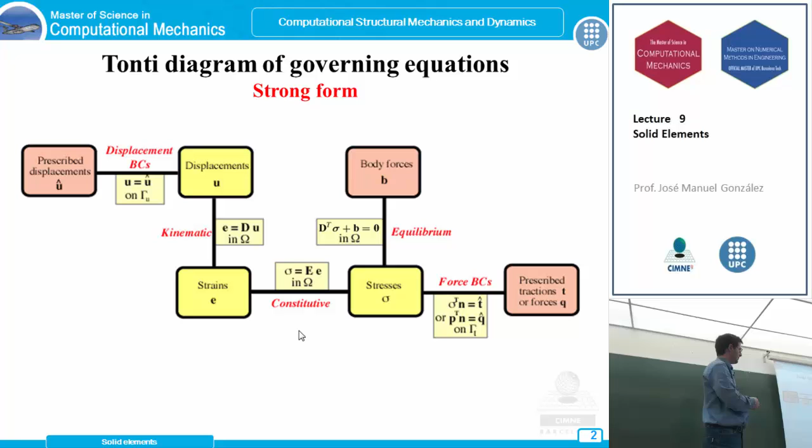So we involve the displacements as our primary variable, the strains, which are the first derivative of these displacements, the stresses, which are related with the strains using a constitutive law. So in fact, these stresses involve a first derivative of the displacements as well, and they are constrained by these prescribed displacements, which involve this primary variable, the body forces and the prescribed tractions, which involve this stress domain. So these are our unknowns, and this is our data. The yellow squares are the unknowns, and the red ones are the problem data. So this is the problem we are trying to solve, the same scheme we've been following until this class. This is the weak form.

Remember that our strong form is transformed using this total potential energy principle. So we are solving a minimization problem for the equilibrium equations and the prescribed boundary conditions in forces. So our problem is a weak form using this integral of the energy. So this is what we call the weak form of the problem, and this is something important we're going to talk about a bit later when we talk about convergence.

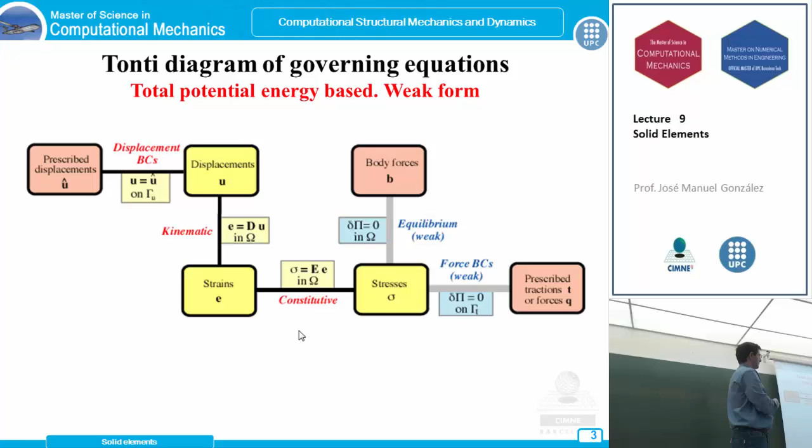So in the case of solid elements modeling, there are some important things to say, because really the world is a three-dimensional problem. So usually we have to solve a three-dimensional problem, and we want to model all the details in our structure. So these solid elements allow us to make a much more realistic simulation. The boundary conditions are applied in a realistic way. The loads are applied in a realistic way. The geometry is able to take into account all the details. So in fact, we are trying to model three-dimensional problems.

This is our objective. The point is that this three-dimensional simulation has got quite an expensive price to pay, because usually our meshing work is much more difficult. The computational cost is quite higher if you want to solve a three-dimensional problem. Even the post-processing phase could be much more complex, because the results we are going to obtain are much more difficult to interpret. So a three-dimensional problem is not always the best thing to solve, depending on the complexity of the geometry in our problem.

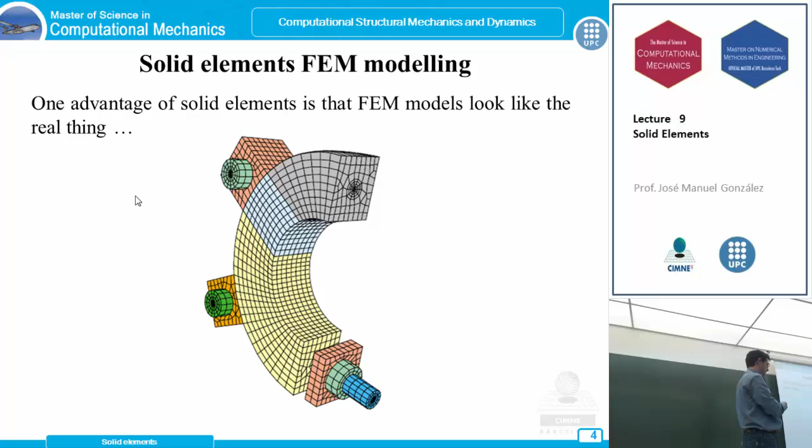Okay. If we talk about solid elements, we have three standard solid elements as a reference, usually employed in this simulation. Same way that we have triangles and quadrilaterals in the plane stress or in the plane problem. In three-dimensional, we have tetrahedron and hexahedron, usually the most useful solid elements. I like hexahedron. I prefer hexahedron for three-dimensional simulation.

Tetrahedron has got the same capabilities and the same problems as triangle. It's very easy to get a mesh with tetrahedron, but for structural analysis, the results are not very good. So we use tetrahedron above all to teach the finite element formulation. Although if you want to get a good result with a tetrahedron mesh, you must use a lot of tetrahedron elements to get a good accuracy in the simulation. So I usually prefer for a three-dimensional simulation the hexahedron, we call it brick, this hexahedral element.

We have this pentahedron element, which is with a triangular base. It's not very common, but sometimes it's useful for very special cases. For example, imagine that you want to make a structured mesh. This is a typical example. This is a dam, and you want to make a structured mesh of your domain, and sooner or later you will find these kind of elements here, these triangular based solid elements. So to adapt a structured mesh to a non-rectangular, non-square domain, we use these sort of Toblerone elements, called pentahedron elements, wedges.

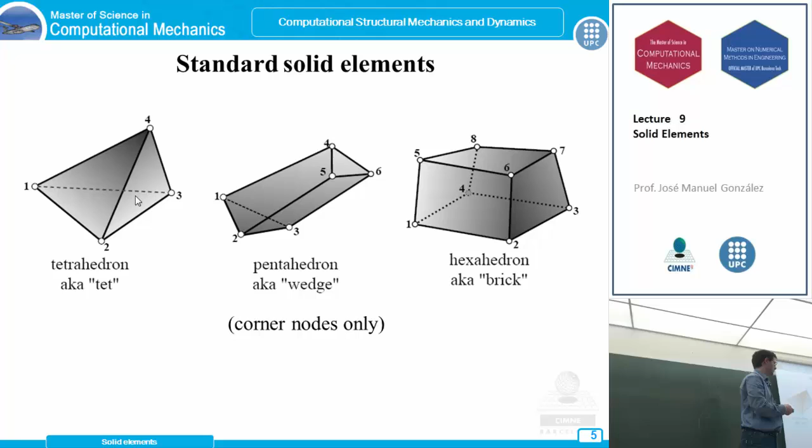These are the three reference solid elements, and they are represented here with the nodes in the corners. So we have 4 nodes, 6 nodes, and 8 nodes for these 3 reference solid elements. They are not only formulated with the nodes in the corners, so we can create solid elements with the nodes in the midpoints of the edges. So here in the upper part, you have the representation of a quadratic tetrahedron, hexahedron, and a quadratic pentahedron, and we have 2 non-standard solid elements, these 2 elements here in the lower part.

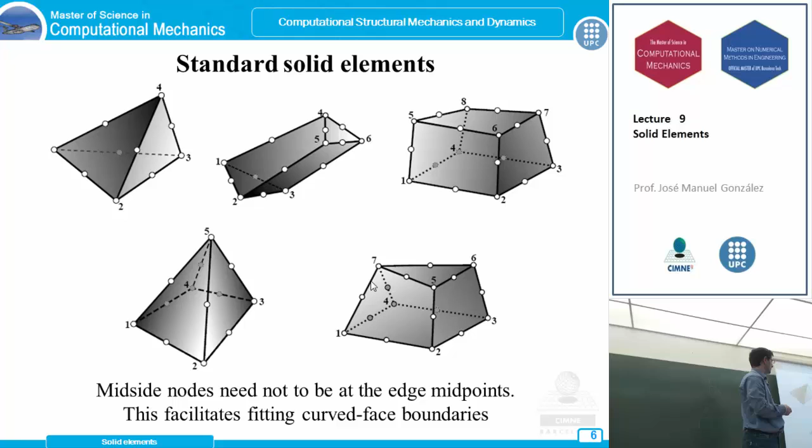Here we have represented the nodes in the midpoints of the edges, but it's not necessary that these nodes be placed in the midpoint, so we can place the nodes everywhere depending on the kind of element we want to use and the information we want to get.

These solid elements, all of them, the reference ones and the non-standard ones, can be formulated using the isoparametric method. So we have a geometry definition, again depending on the number of nodes, where in this case we have 3 Cartesian coordinates, x, y, and z. So we need, for n nodes, n shape functions, 1 per node, so that these 3 Cartesian coordinates are expressed using this interpolation with the nodal values, the coordinates of every node.

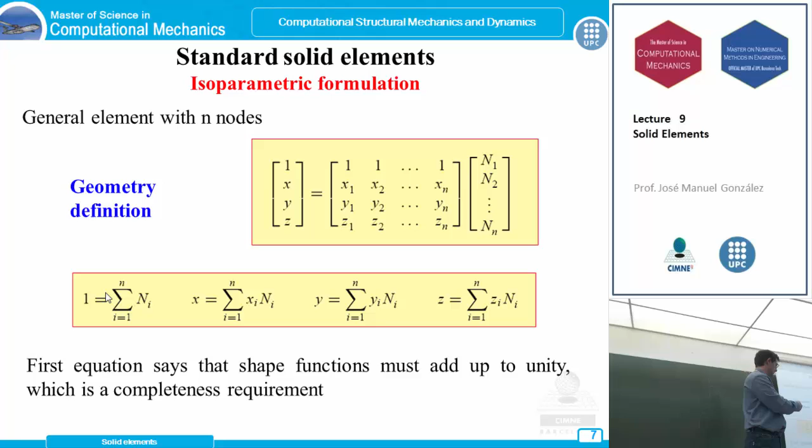So we have 4 nodes, 8 nodes, 6 nodes for the 3 reference elements, and this completeness condition, which says that the shape functions must sum 1 at every point. So this is the same formulation we've been using the last days with the plane elements and the one-dimensional elements.

Again, our primary variable is the displacement function, so we must interpolate this primary variable, this displacement function, and for it, in the isoparametric formulation, we use the same shape functions as we use in the geometry. So we have now 3 degrees of freedom per node. We are in a 3-dimensional problem, so we have 3 components for the displacement, and if we consider n nodes, we have 3 times n components for the nodal values of the displacement.

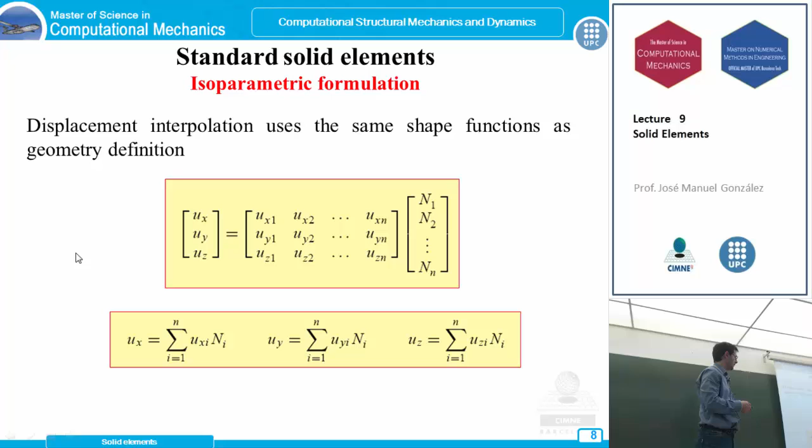We are going to interpolate all the displacement function using these same n interpolating shape functions, same as the ones we used in the geometry. So our interpolation for the displacement function will be this, expressed for the 3 Cartesian coordinates and the 3 displacement components, x, y, and z, in the solid problem. Here we have the vector of the degrees of freedom. So we have 3 degrees of freedom per node, so 3 times n unknowns for the displacement.

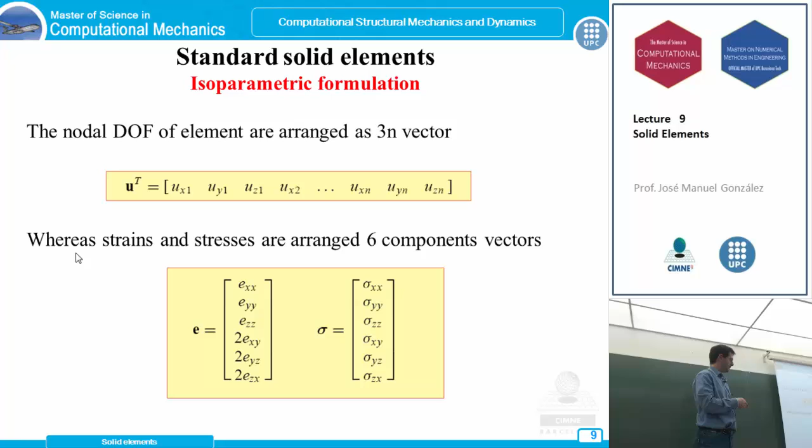The strains now have got 6 components, all of them, the ones in the strain tensor. Same thing with the stresses. Remember, in the plane stress and plane strain we have 3 components. In the axisymmetric problem we have 4 components. Now we have all 6 components for stress and strains.

And the kinematic condition for the strain displacement equations and the strain displacement matrix comes from these partial derivatives with respect to the Cartesian coordinates of this displacement function. This is the continuum problem. This is the interpolation of the displacement, and we apply the derivatives of these shape functions with respect to these Cartesian coordinates using these nodal values. So this strain function is expressed like this: B strain displacement matrix times these nodal values of the displacement.

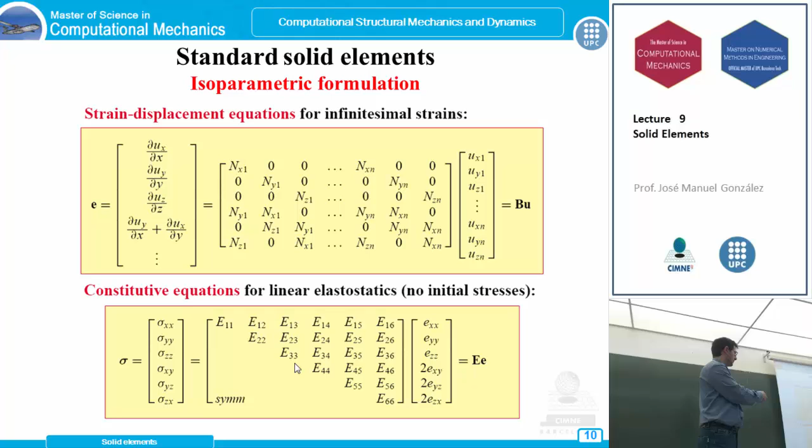We have the constitutive equations. These constitutive equations relate the strain and stress vectors. Remember that this in fact is a tensor, a 3 by 3 order matrix, but we express these strain and stress components using these 6 component vectors. So we have a 6 by 6 order elastic matrix, constitutive matrix, relating these two magnitudes, and using all the formulation coming from the total potential energy principle, this minimization problem, leads us to the expression for an element stiffness matrix.

So for any element with n nodes, we have this expression coming from this variational formulation, which says that this stiffness matrix is the integral of the B strain displacement matrix transpose times the elastic matrix times this same B matrix all over the volume. Now it's a volume in the solid element, and we can calculate this stiffness matrix using numerical integration. So we have Gauss integration rules as usual. We must decide the number of Gauss integration points. So this stiffness matrix can be calculated using this summation, considering these weights.

This B strain displacement matrix, remember, is usually expressed in the natural coordinates, and this Jacobian involves the change of variable between the Cartesian coordinates and the natural coordinates. This is the Jacobian matrix. In fact, this is the determinant of the Jacobian matrix involved in this numerical integration. Now we're going to say something about this integration.

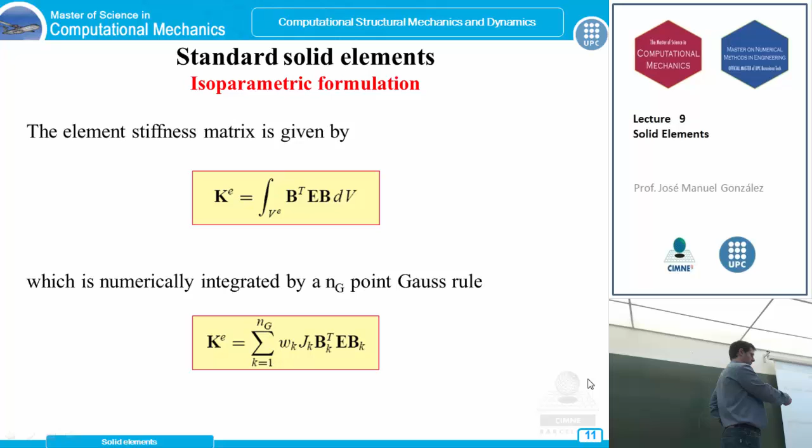Take into account that with this multiplication, you are going to make this summation operation, you are going to make this multiplication once and again. So you're multiplying lots of zeros. So to avoid this computational cost, usually we can express directly this product in a closed form like that, so as to avoid these multiplication calculations, most of which are unnecessary. Okay? Any more questions about this?

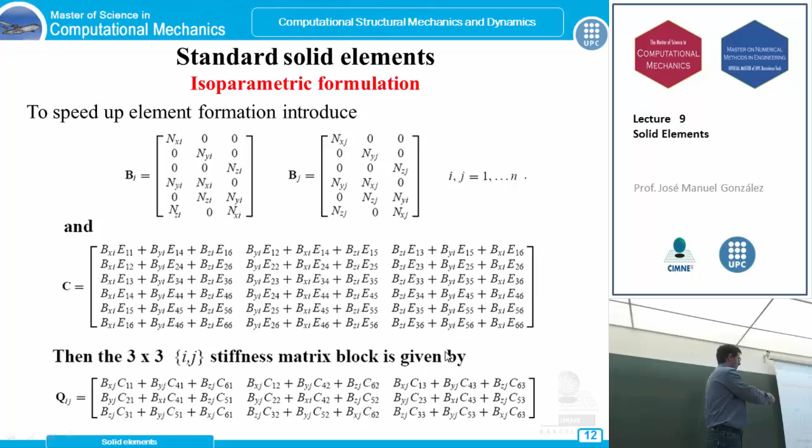Well, this is the general formulation. Now we are going to be precise in each particular case. We are going to say some things about, for example, the linear tetrahedron. Remember the linear triangle, so we have now some formulation for the linear tetrahedron. We define this linear tetrahedron using these 4 nodes placed in the corners. So these 4 nodes with the Cartesian coordinates define our tetrahedral element.

An important point is the numeration of these nodes. So there is a convention for this numeration, the distribution of the numbers, because we want to calculate the volume of this tetrahedron, and we want to guarantee that this is a positive quantity. So we want to assure that this volume is positive. We calculate this using this expression. This is 1/6 of the determinant of this matrix here.

And to guarantee this positive number, we want to assure that the numeration follows a convention, which means that if you are placed here in this node, which will be the last node, the 4th node, you look at the opposite face, and you choose a counterclockwise direction of the numeration. So this is the numeration we must define, looking from node 4 to the opposite side, to guarantee the positiveness of the volume. This is a convention, just to work with positive values of the volume.

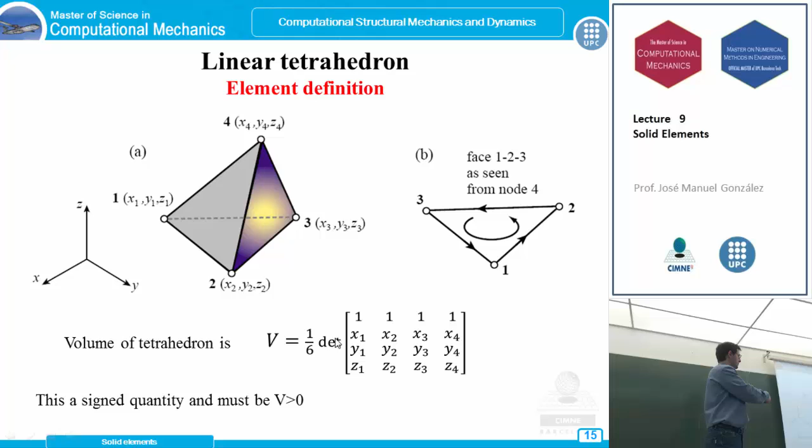So once this numeration is defined and the Cartesian coordinates are known, we define our natural coordinates. For the linear tetrahedron, we must make an extension of the triangle idea about the natural coordinates, which we call triangular coordinates in the plane problem. But the idea is the same. So for every one of these 4 nodes, we have a natural coordinate. We can call it ζ1, ζ2, ζ3, and ζ4, which has value one in the corresponding node.

So this ζ1 natural coordinate has value one in node 1, and we have a surface parallel to the opposite side, which is translating, with decreasing value, so that this value 1 becomes 0 on the opposite side. So ζ1 is always 0 on the opposite side. So we can interpret this natural coordinate as a translating surface from the corresponding node to the opposite side. Same idea we used in the linear triangle in the plane stress problem.

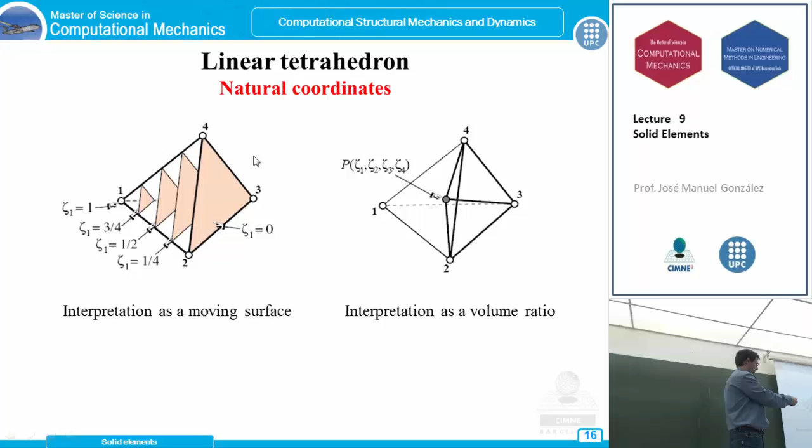We can also interpret this as a volume ratio. So if you place a point inside the tetrahedron and you join this point with the 3 nodes 2, 3, and 4, you define a smaller tetrahedron whose volume over the total volume gives this natural coordinate. So this natural coordinate is the volume ratio between the volume defined by the point and the total volume of the tetrahedron. Okay, so this natural coordinate has these two interpretations in a tetrahedral volume.

Okay, so now we have our natural coordinates, which means that for every function f, we can calculate an interpolation of this function f depending on the natural coordinates, using these 4 natural coordinates and the values in the 4 corner nodes. So this is our interpolation expression for a linear tetrahedron. We can express it in this way using Einstein notation.

So if we choose as the f function the Cartesian coordinates function, we can express the interpolation of this geometry using these 4 shape functions and these 4 nodal values for each of the 3 components of our 3 degrees of freedom per node. This is the consistency condition.

Again, typical from isoparametric formulation, we can invert this relation between Cartesian and natural coordinates. So natural coordinates could be expressed from the Cartesian coordinates using this expression here. This is the total volume of the tetrahedron, and the displacement interpolation is again using these 4 natural coordinates, linear tetrahedron, and the 4 values for each component. So we have a linear interpolation of the displacement function.

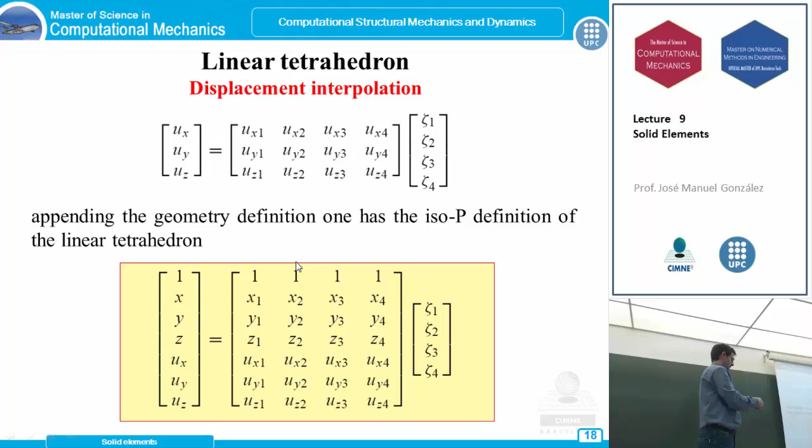And to calculate this strain displacement relation, which we saw in the general formulation before, now we have these 6 components for the strains, the 3 general components, and these distortions. Remember that this is the distortion divided by 2, but the tensor, the distortion is twice the tensor quantity. So this is distortion divided by 2. So we multiply by 2, we get the total distortion for these 3 components. These are the partial derivative operator, and we have this displacement vector considering these 3 components of the displacement.

We have this interpolation using the shape function. So now this derivative operator times the displacement gets to the strain tensor matrix using this B strain displacement matrix relating the strains and the nodal values of the displacement, considering an expression like that. Remember that for these natural coordinates, these partial derivatives are constant. So we have constant components of the B strain displacement matrix,

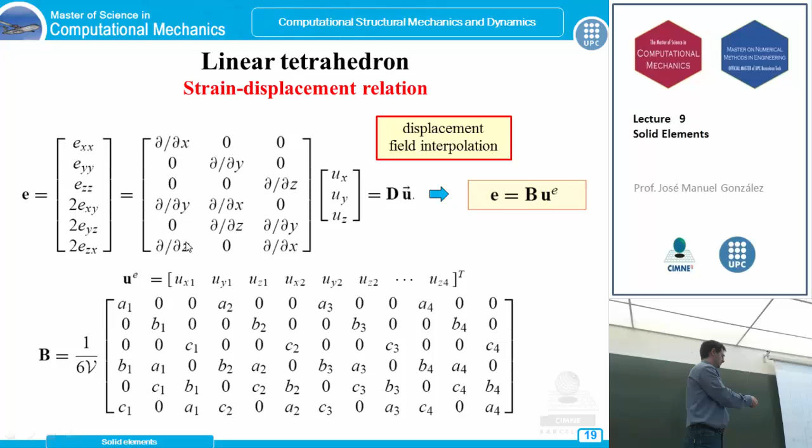and this was our displacement vector. Now we have 4 nodes, so we have 12 components, so 12 degrees of freedom in our linear tetrahedron element we want to solve to get the solution of the problem.

The stresses are got using these constitutive equations, considering this elastic matrix. In a general way, this elastic matrix is a 6 by 6 order matrix. So we have 36 components relating these 6 stresses and 6 strains for the 3-dimensional problem. This is a known matrix for the elastic problem. So in general, the constitutive equation relates these strains and these stresses using this 6 by 6 order matrix.

And finally, we got to the stiffness matrix using the same expression we saw before, integrating this term here, considering this B strain displacement and this elasticity matrix seen before. Taking into account that this B strain displacement matrix has got constant components, we can take this matrix out of the integral. We usually consider a homogeneous material, so this elastic matrix can come out of the integral, and usually for this linear tetrahedron we can calculate this elastic stiffness matrix like that, with this constant term times the volume, because we are integrating over the volume of the tetrahedron, and this is the calculation of this stiffness matrix for a linear tetrahedron element.

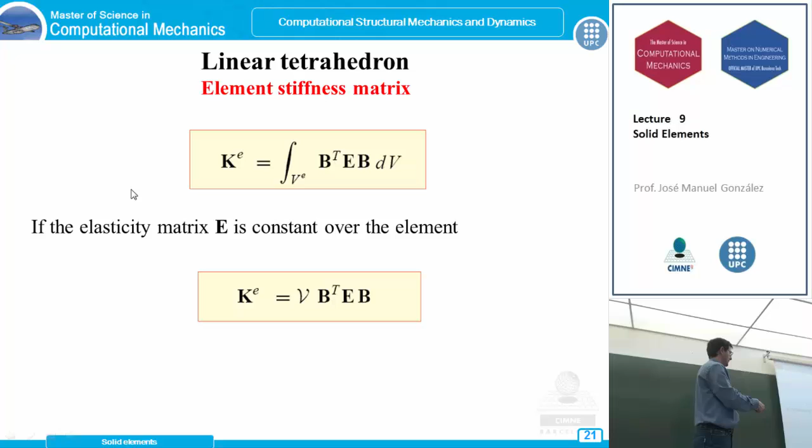And taking into account the consistent nodal vector for body forces, the expression is this one, again involving this shape function matrix and these body forces. So we have no partial derivatives here. We have this shape function matrix, which involves these 4 natural coordinates. This is a way to represent this shape function matrix times the body force. Usually this body force has got 3 components, so we must integrate this term over the volume.

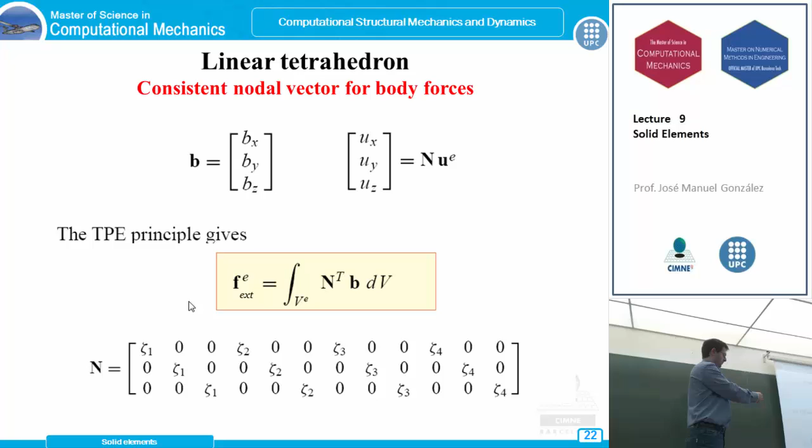Now this matrix is not constant, so we cannot take it out of the integral; we must calculate the integral to get this consistent nodal vector for the body force. Remember that this consistent nodal vector is consistent because of the result of our minimization problem of the total potential energy. So everything goes more or less like we saw in the plane problem,

but extended to the three-dimensional problem. Remember that with the linear triangle we had the same conclusions because we had a B strain displacement matrix with constant components. We took it out of the integral, and we calculated in a closed form this stiffness matrix, as we can do in the linear tetrahedron.

And what we said in the quadratic triangle, we can say something similar for this quadratic tetrahedron. Now it's created using 10 nodes, 4 of them located in the corners and 6 of them located in the midpoints of the sides. This is a typical quadratic tetrahedron.

Now this distribution of nodes allows us to consider a non-straight, curved configuration of this element, because we can interpolate the geometry using a parabolic function in every edge. So here these 3 nodes allow a much more complex interpolation of the geometry.

So we can use this quadratic tetrahedron when the geometry requires this kind of interpolation. But if we use this quadratic tetrahedron, the natural coordinates can be interpreted in the same way, considering this corresponding node. For every node we have a shape function. For this corresponding node 1, we have a shape function with 1 value and 0 in the opposite.

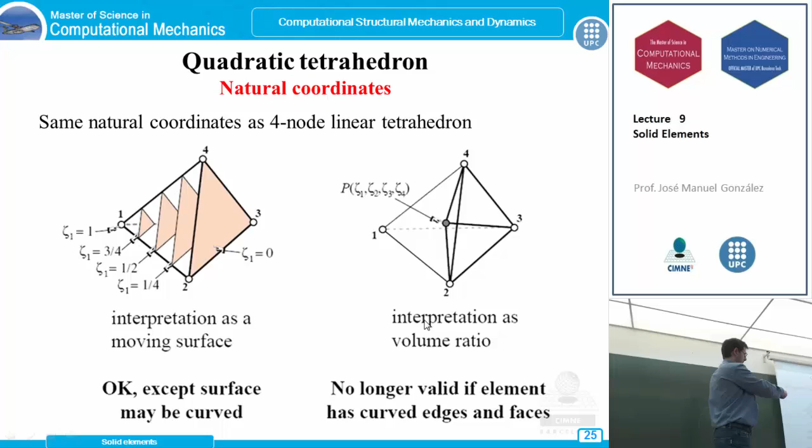So ζ1 times ζ1 minus 1/2 vanishes the shape function in all of the non-corresponding nodes with respect to this one. So the corner node has got a shape function with this shape, ζ1 minus 1/2, and then we have a normalization factor again because we want to get one value in this corresponding node, node 1. So we have a normalization factor which is 2. So finally our corner shape functions, these 4 shape functions, have got this same shape involving the natural coordinate of the node 1, and the midpoint nodes,

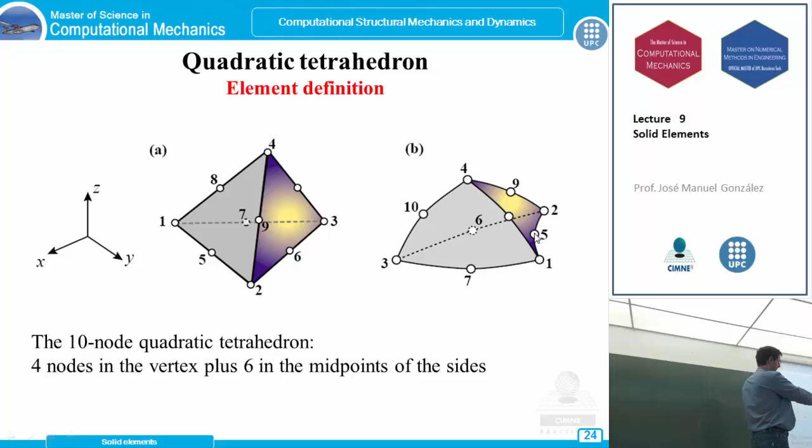for example node 5, always involve the natural coordinates of the 2 adjacent nodes, because the ζ1 coordinate vanishes all the opposite side, the ζ2 coordinate vanishes all this opposite side, so at the end we have only this node 5 which doesn't vanish. So with this formulation, with this line product method, we get that node 5 has a 1 and a 0 in the other nodes. So again, this normalization factor assures us this 1 value in node 5. So the 6 midpoint nodes have got shape functions with this shape, which is the same as in the quadratic triangle we saw some days before.

So we have these shape functions for the nodes of the quadratic tetrahedron, and again now it's not so easy to calculate this partial derivative, so we're not going to get a constant components matrix. So we usually use numerical integration, and for this numerical integration we use Gauss integration rules like this one. So we have a 1-point rule or 4-point rule to integrate this quadratic tetrahedron, which means we must evaluate this function in these 4 natural coordinates, and this numerical integration over this volume is calculated like that.

It is the evaluation of the f function in these 4 natural coordinates, 1/4 all of them, or for the 4-point rule we get this numerical integration evaluating this general f function in these 4 combinations of natural coordinates where alpha and beta are prescribed, known values, to get a numerical integration of this integral. We get degree 2 and degree 1 depending on the Gauss integration rule we choose, to assure an exact integration of a polynomial of degree 1 or degree 2, depending on what we are interested in getting. So our stiffness matrix now is usually evaluated using numerical integration.

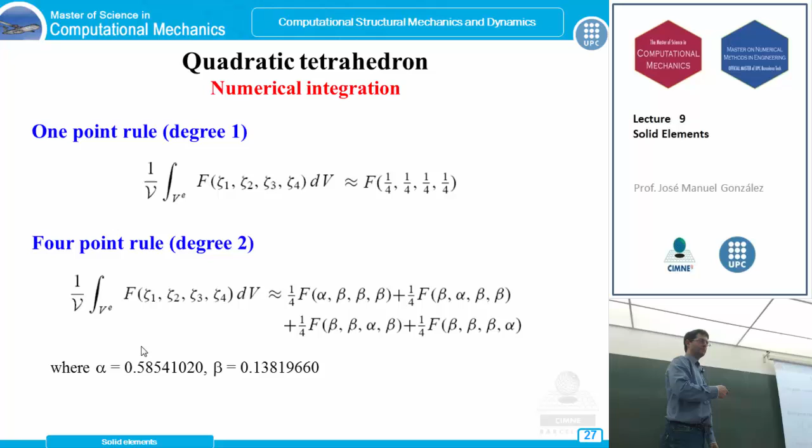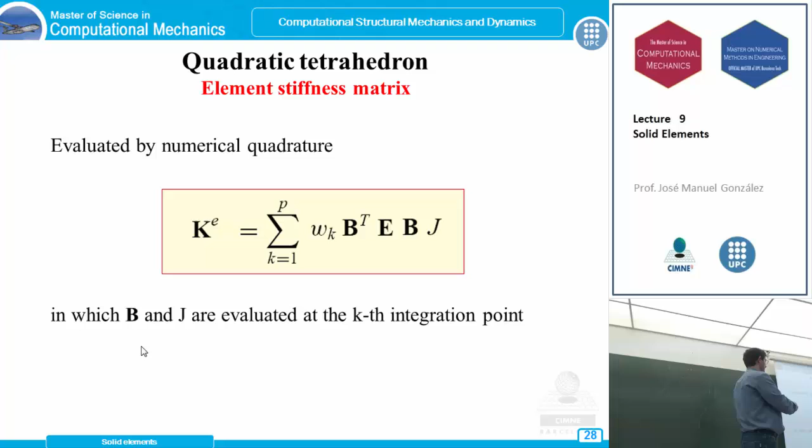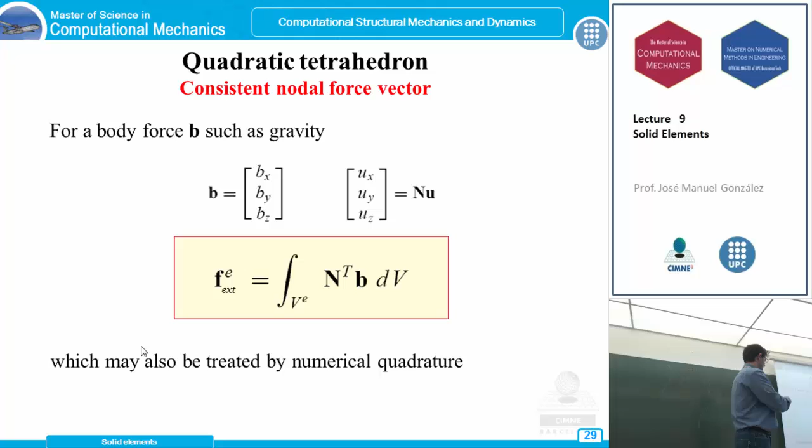Well, we are talking about this numerical integration, and finally, this is the evaluation of the stiffness matrix using this numerical integration. As I said, B and J are evaluated at these prescribed integration points. And the same with this consistent nodal vector. Now we have this shape function matrix expressed in natural coordinates, so we are not able to take it out of the integral, so we calculate it in the same way using this numerical quadrature. And this is the treatment for this linear and this quadratic tetrahedron.

Hexahedron elements, which I think are more interesting than tetrahedral elements, above all for bending problems. For bending problems, this is quite better than the tetrahedron. I'm not going to show many more slides because everything is calculated in the same way. It's an extension of the quadrilateral elements, and from this hexahedron element we can easily extract the formulation of all of the hexahedron elements.

This is the simplest one, with 8 nodes, and again this 8-node linear hexahedron has its isoparametric representation using these 8 shape functions. Maybe the most interesting thing is that we must assure that this volume is positive, and to do it we have a convention to define the numeration of the nodes. So we choose one node, for example this one. This node belongs to three faces, so we choose one of them, for example this horizontal face.

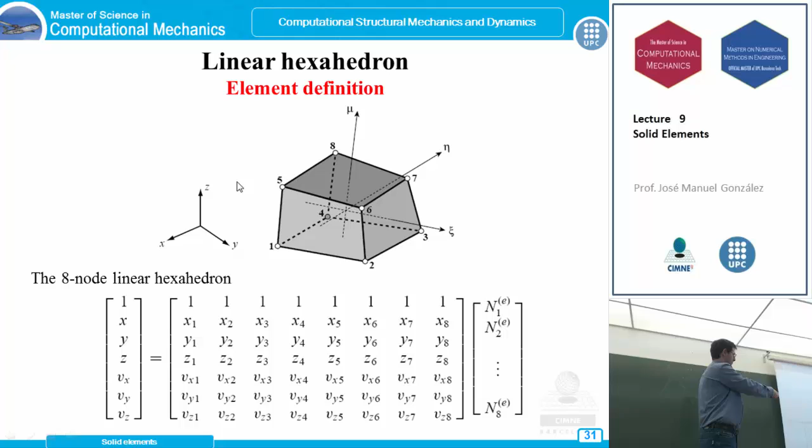So for every node, this one node, it's easy to vanish the shape function in the opposite sides by using these binomial terms here. Same thing as we saw in the quadrilateral, so 1 minus ξ and 1 minus η vanishes this shape function in the corresponding opposite sides. Now in the 3D problem, it's just a question of adding this binomial term with this third coordinate, and this is the normalization factor, which from 1/4 in the plane problem comes to 1/8 in this 3-dimensional problem, and all of these 8 shape functions are calculated in this way.

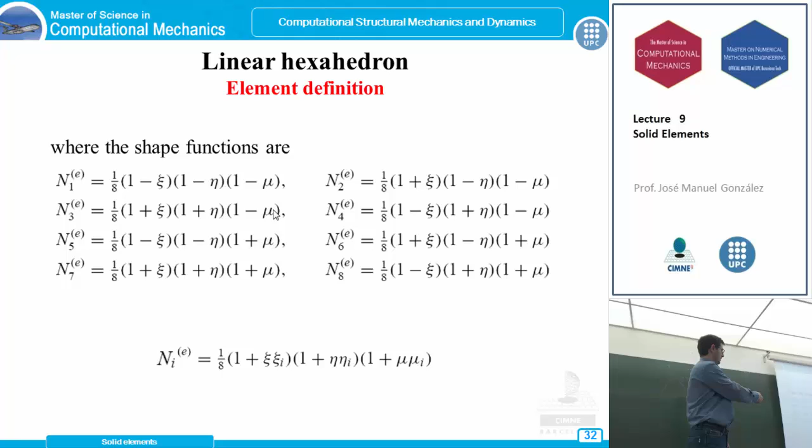So it's very easy using this line product method to get the shape functions of these 8 nodes for a linear hexahedron, as we have defined in the last slide. In a very compact notation, we can express these shape functions using this point where ξ sub i, η sub i, and μ sub i are these positive and negative signs in these 8 shape functions. So once defined these functions, we can easily calculate the strain-displacement matrix, the stiffness matrix and the consistent nodal vector in the same way. So we are going to extend this formulation again.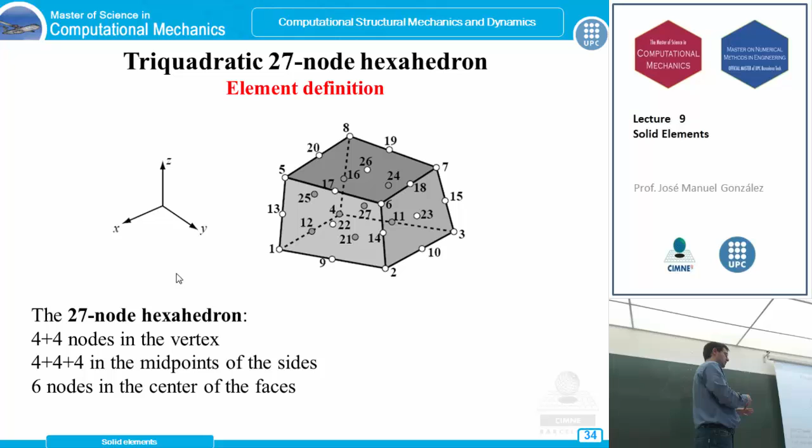Just a couple of words about three-dimensional modeling, because as I said in the beginning of the class, you must be very clear if you want to make a three-dimensional simulation. You must have a very good reason. Take into account the constant strain triangle, the linear triangle, and the constant strain tetrahedron, the linear tetrahedron. If we compare, we have 3 nodes, 2 degrees of freedom per node, that's 6 degrees of freedom, so our stiffness matrix is a 6 by 6 matrix. If we change to the three-dimensional problem, it's a 12 by 12 matrix.

If we have a plane mesh of 20 elements, just prescribing a defined size of element, we have 20 times 20 times 2 degrees of freedom, which means we have 800 degrees of freedom. If we get the same mesh in a three-dimensional problem with the same size of element, we have 20 times 20 times 20 times 3 degrees of freedom per node, which means we must solve 24,000 degrees of freedom. This is something we must think about if we want to get to three-dimensional simulation.

So if we double the number of elements, we have 4 times the degrees of freedom. If we do the same in a three-dimensional problem, we're going to multiply our degrees of freedom by 8, just if we want to refine the mesh using half the size of the element we are using. We must take into account that the bandwidth is much higher in 3D than in 2D. This is a storage problem. So maybe we are not interested in storing the whole matrix. In 3D this bandwidth is much higher, so we must use a lot of memory to store our stiffness matrix.

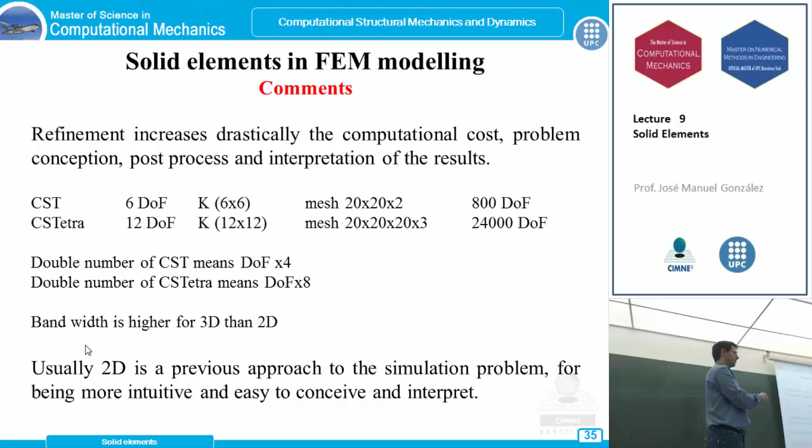And one more comment, considering the computational cost. Imagine that we define the ratio between the computational cost we use in the assembly of the stiffness matrix and in the solver with respect to the total computational cost in the CPU. If we define these two ratios, in the two-dimensional problem these two ratios are similar. So the assembly of the matrix and the solver spend a similar fraction of time in the solution of the problem. But if we come to 3D, this second ratio is much higher than the first one.

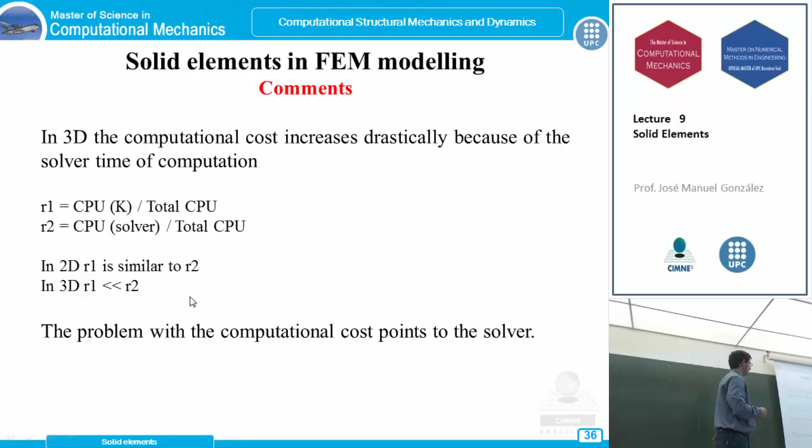So the solver is going to take most of the total computational cost with respect to the assembly of the stiffness matrix. So if we come to the three-dimensional problem, our computational cost will be in the solver, much more than in the stiffness matrix. Okay, let's take into account these small details if we want to go to a three-dimensional simulation.